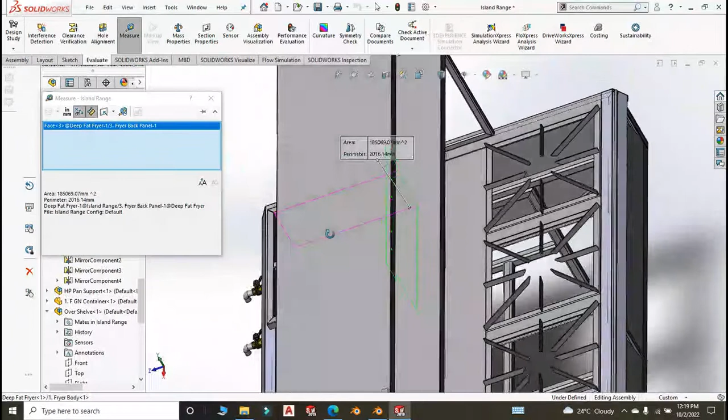So if we do 260 would be fine, by 260 by... this is 538. We do 260 by 525. That would be good.

So let us open a new file and go to part, click OK. Then as usual, most of the time we start with our top plane, start a new sketch, corner rectangle, and from the origin, make sure you give it some dimension distance there. So this we said would be 525. Remember, I'm using the metric system, and this should be 260.

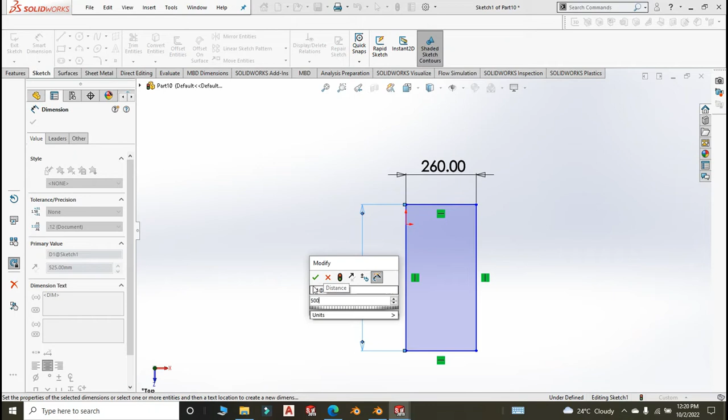The basket will be made of... actually, can we make it 260 by 500? Will the 25 make a huge difference? Yeah, let us give it 500. We are going to use a rod of diameter 3 millimeters. So here from the origin we make this 6 millimeter or something like that. Yes, that's good.

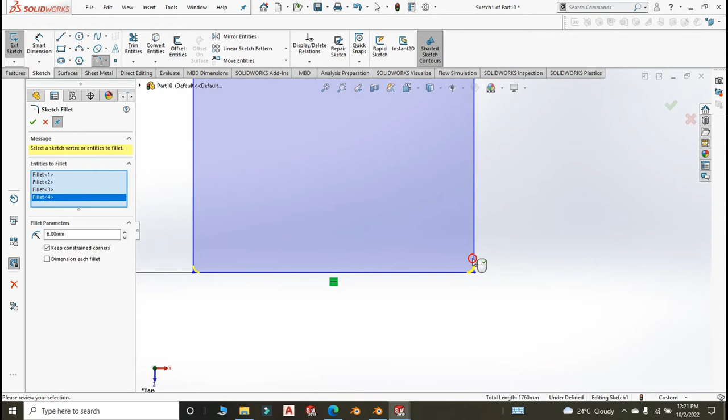Then we go to fillet, and we fillet it by 6 millimeters. We want the origin to be at that point where the fillet ends, because we intend to sweep through these. Exit the fillet and exit the sketch also.

Now if we could go to the front plane and start a new sketch, and we create that circle that we'll be using for sweeping through the first sketch, and we give this a dimension of 3 millimeters.

That part looks okay. You can assign some material to it. And this is metal. See whether we have chrome plated metal, and assign these two.

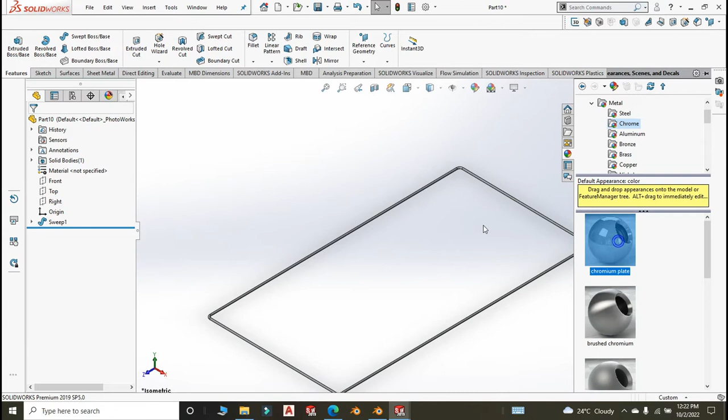We didn't choose here. Then here we double click, then go ahead and save this. I have a folder here known as fryer, then a subfolder known as basket. Call this part number 1, and we call it basket frame, or something, whatever you want.

Basket frame, save. Now before we continue, let us do this. Let me check the first sketch because I intend to move some few planes here and there. First sketch, let me try to recall the dimensions. This is 260 by 500. Actually 500 minus 6 will get what we want.

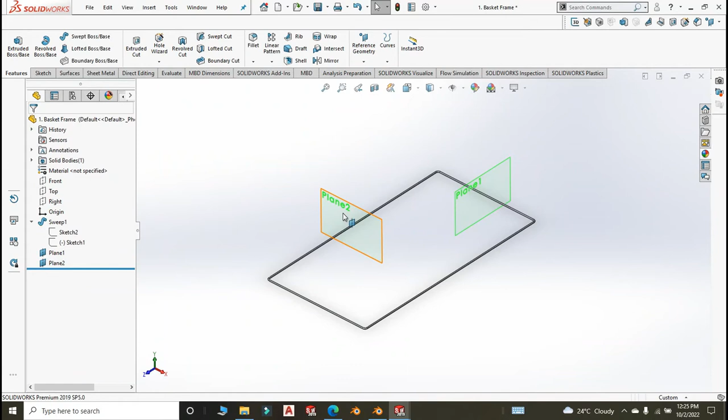Then also we go for the front plane. This front plane, we were not supposed to create a sketch there. We want to create a reference plane, and this was 500 by 2, that is 250 minus 3, 247. I'm not very sure whether it will be there, but should we need to edit it to do some adjustments, we are going to edit.

Now we create uprights. We go to file and go for new part. Okay, and we go to top plane again and start a new sketch. This time it's just a circle which we are going to extrude, and the diameter of the circle is 3 millimeters. Good. Then go to feature and extrude it, and our basket will be having a depth of around 150.

I don't know whether we should do a mid plane or... that's good, this is good.

150. That's okay. Then again we go to top plane and create a reference plane, and that should be at half of 150. Half of 150 is 75.

Now go ahead, okay, we hide this plane and we save this as part number 2, call it basket upright. You don't worry about the naming, you can name it appropriately, just come up with some words, some names.

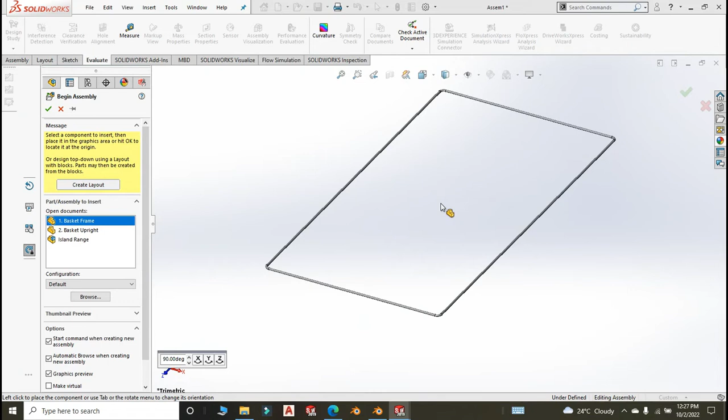Okay, we go to assembly. We want to see whether our planes are good and whether we are going to be heading somewhere. And this time around we want to import the basket frame. Let us right click and make it float first so that we may do the necessary mating.

Make it float. Then we go to mate, and we will take the front plane of the workspace, and plane number 2. That's okay.

Then we go for the top plane and the top plane of the workspace. That's okay. Then the right plane - right plane, is it right plane? Yeah, right plane - of the workspace and plane number 1, so that our base, our framework might be centered at this at the workspace.

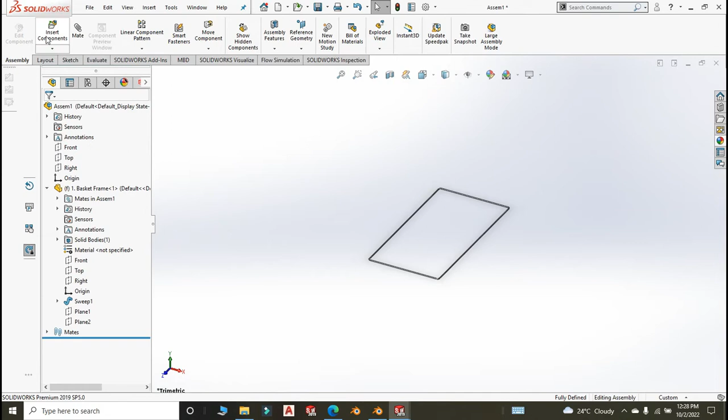Now right click it again and make it fixed. Fix it. Okay, now insert component, and our component we are inserting here is the upright. Now we can do some mating.

Go for the top plane, and the top plane of the upright. Click OK. Then go for front right plane and right plane of the framework. That's good.

I don't know where the orientation of the front plane... Yeah, I remember where the orientation is good, and this plane here. That's okay.

Now remember, this is something that you should not worry so much about when you are doing your work. We don't fabricate this - there are some guys that we contract to do fabrication. This is just for representation. You might find that it is not accurately done, but it is for representation. At the end of the day, we want our cooker to be having everything.

Now I'll go for linear component. I will choose this face as the direction. The gap between the upright members, about 3 or 6 millimeter, and we want how many of them. We will add or minus - I think it will be adding.

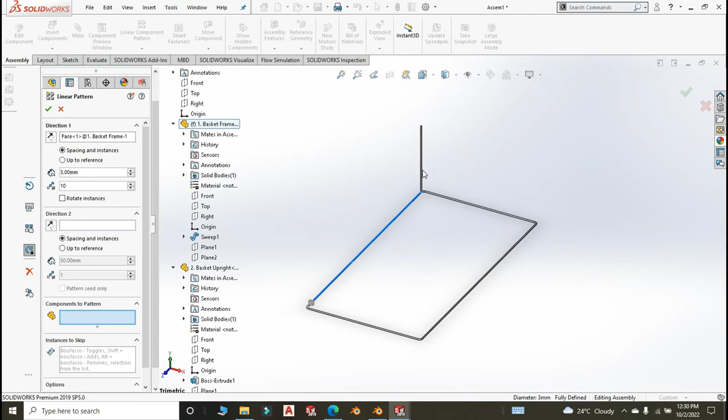From there we change direction and see how they look like. 3 millimeter is way too small. Can make this 6 millimeter. 6 millimeter still looks a little bit small. 10 is big - of course 10 is big, but we will work with 10.

Then we will increase this to around 50. See what happens. 50 is good. 50 is pretty much good.

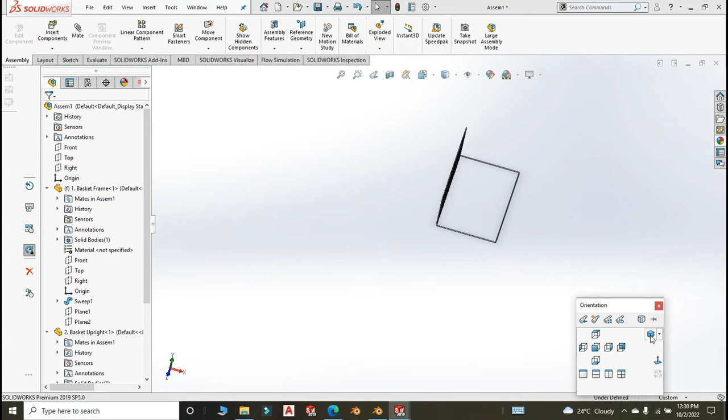Exit the linear component. Now remember the planes that I was telling you about? This plane - selecting that plane and going for mirror components will help you mirror the uprights. So you go for the linear components as the components to be mirrored. Click OK. There you have your components.

Now there is something that I didn't do - let me first save this. Save it as fryer basket. Fryer basket. That's good.

Now there is another plane - there is a plane that I created on the upright. We want to mirror... actually we shouldn't be mirroring, we should do some linear component in this direction. Change the direction, and spacing and everything is the same.

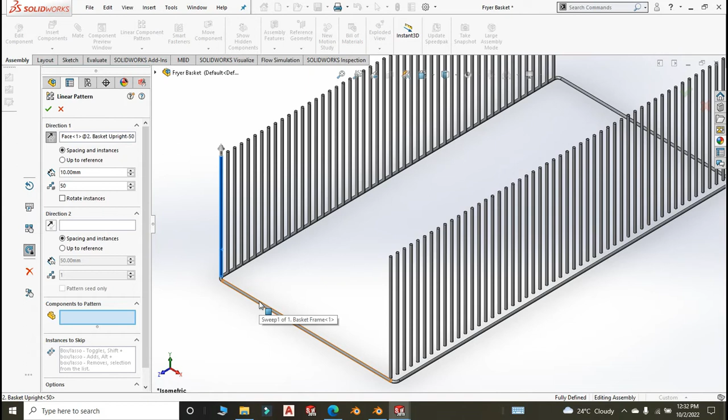Then the component to be linear is that, but 50 of them is way too much. This might be 20 or something. 20 is also a lot.

How is the last one? Should it be 19 or 18? 18, 17, 16 - that's good. Yes, our basket is really taking shape.

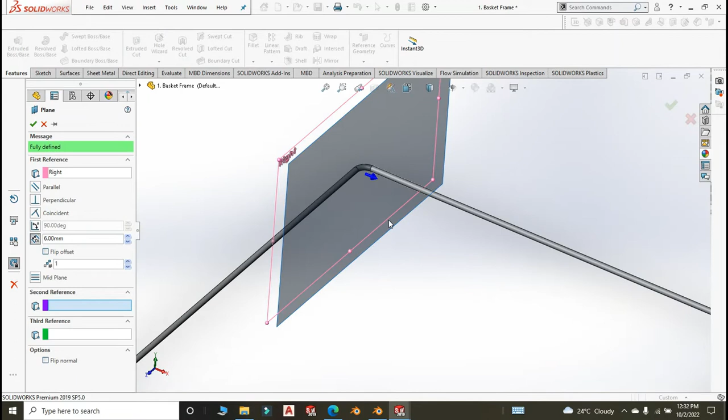Now if I could go for this, open, I need to create another reference plane, and that plane should be the right plane. I create a reference plane and offset it by 6mm. Yeah, 6mm goes right at the end of the fillet - that would be pretty much okay. That is plane number 3.

We can go ahead and hide the plane, or you can just leave it, but for the purposes of not getting confused, it is better you hide it.

Now, with that plane being there, we insert another upright member. I'm not so sure whether we have, there might be one more plane that we might be requiring, we'll see about that. So the new member we inserted, as usual, top plane and top plane of the new member are supposed to be meeting. Click OK, then we go for the right plane of the new member and the new plane that we just made as a reference, that is plane number 3. That's pretty good.

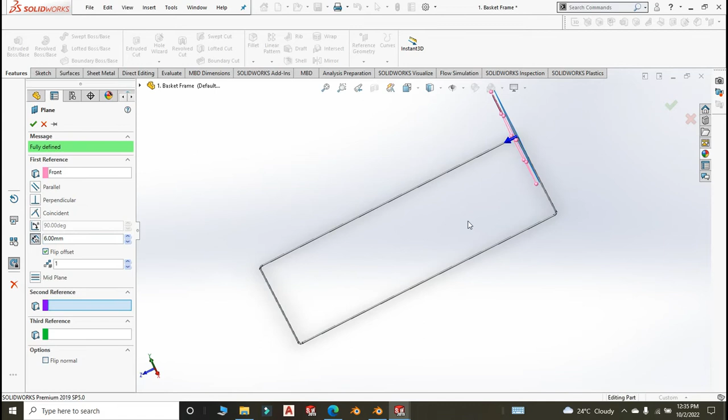Then we need another plane running up here. Let me first exit the mating, I will come and complete it. Then I open this and edit which plane do I need. This is the front plane. I create a reference plane and offset it by 6mm, but flip the offset. 6mm takes it right at the center of that member.

Hide it, go back to the assembly, and continue with my mating, and this time around I will choose that plane that I just inserted, that is plane number 4, and the right plane of the second upright member. Is it the right plane? The front plane. Yes, that's nice. Now that mate is good.

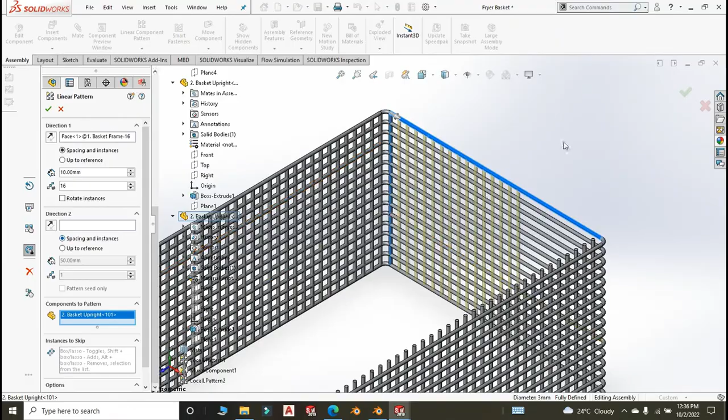Now we want to linear component. We linear that member, in that direction. The spacing is the same, but the number of components might be different. Yes, we need to add a few more. Just click on the upward arrow. Ensure that you have enough. That is enough.

Now we go to plane number 2 and mirror. Do some mirroring. We mirror that local pattern, local pattern number 3. Click OK. I hope the plane we did set it right.

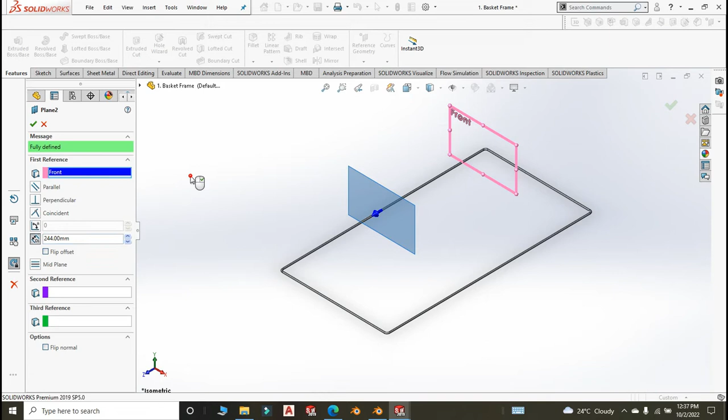No, we didn't set it right. We were supposed to edit that plane and reduce it by 3mm. Open, you can edit it from there if you want, or you can just open the drawing and subtract 3mm. I think that would be fine.

I don't know what is not happening there, there is also an issue with this. This we are supposed to add 6mm. Yes, there is an issue someplace. I don't know why that is happening. We will take a look at it.

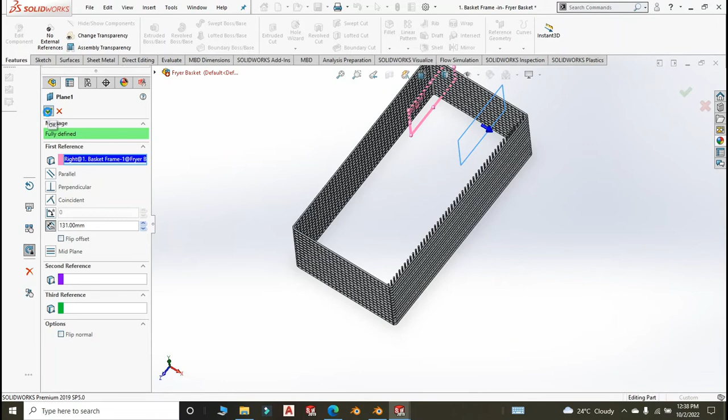Plane number 2, number 1. Plane number 1, if I was to edit it, am I supposed to add 6mm? See whether things will be working. Sometimes it might not update immediately. Plane number 2, plane 2, not plane 2 actually, but it should be plane 1. Let's see whether it will update now.

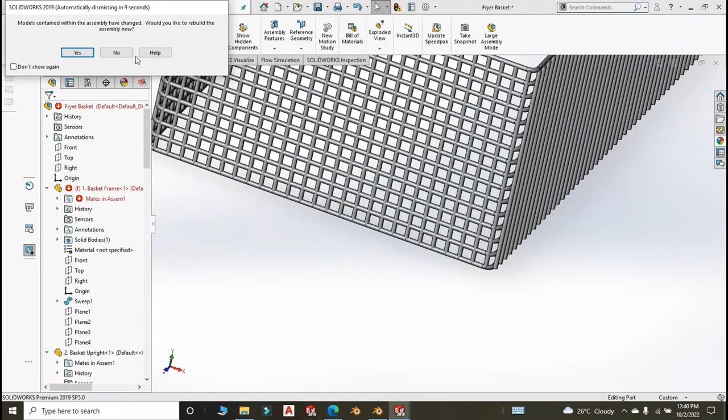We are receiving some errors. Why is it not working? Let's go back and re-edit it, then we will check where the errors are coming from with the mates. Plane number 1, edit, subtract, do 130. Why is it coming to 130? I'm not getting that. Yeah, now it seems okay, but I don't know why 130. Anyway, as long as it is good.

Why do we have issues with these mates? What kind of error is this that we are experiencing here? This coincident. Let's see whether we can fix it. That is which plane? The front plane and the plane of the workspace. Okay, I get it, because it is fixed. Can we right click this and make it float and see whether it will get updated automatically? Yes, the error is gone. Now the errors that we were receiving are gone, but now we can make it fixed again. Yeah, because we edited the planes, that is why we are getting that error.

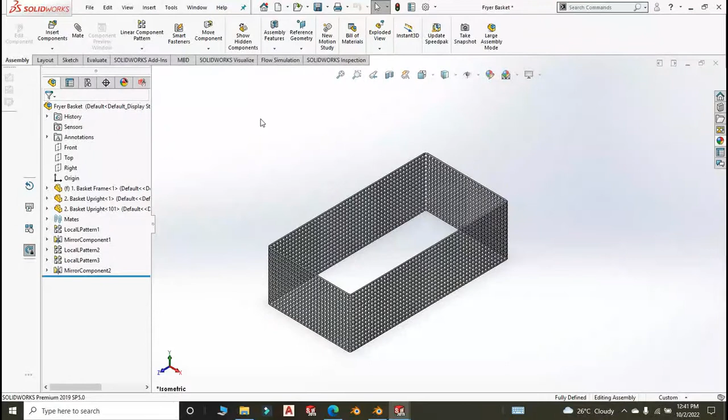Now this is 500, so we need another member there. Go to file, new, and we'll go for part. Click OK. This time around we will go for which plane? Right plane? Not really, front plane. Start a new sketch there and we do a circle, dia 3mm, and we extrude it by 500.

Is it 500 minus 12? Because we gave it a fillet of 6mm and 6mm. We will see, 500 minus 12, 500 minus 12mm. Click OK.

Save this as part number 3. Call it horizontal, or is horizontal written like that? Horizontal member 1, for the basket of course.

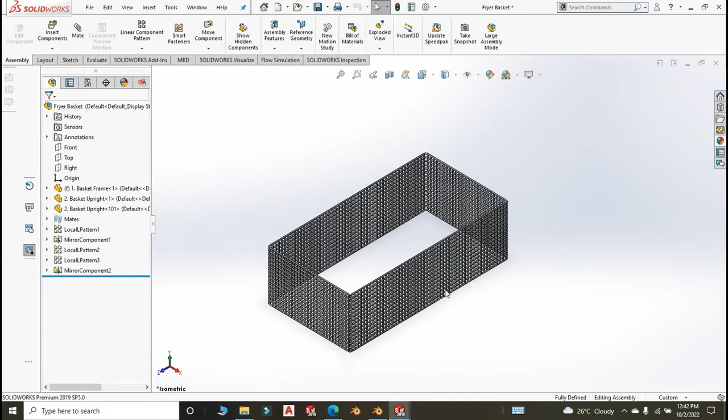Then we go back to the assembly, insert component, horizontal member 1. Now we do some mating. We go for the top plane and top plane of horizontal member 1.

Right click, then we go for the plane here, the right plane, we go for the frame, I think it's plane number 3. Then there is plane number 4, yes, plane number 4 goes with the front plane. Let's see whether that is correct. Yeah, that is pretty much correct and in its right place.

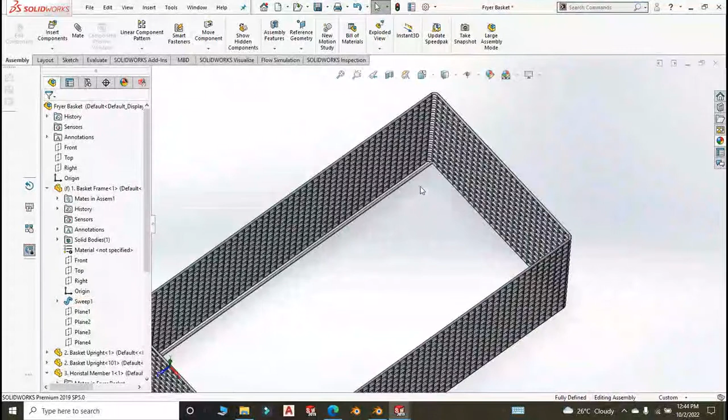Now we can still do linear component. I don't know whether if I edit this linear component, that was linear component number 3, can I edit it? Yes, and here I choose this. That's pretty good.

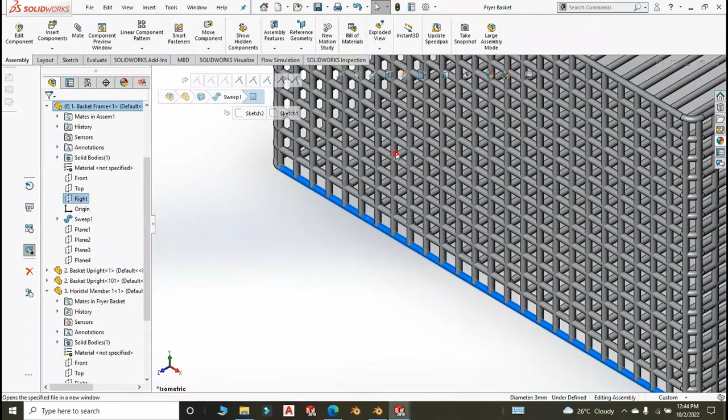Oh sure, save your work, don't lose anything. Now this was 120. It's always good to do a referencing and counter check on everything. This was 260 from end to end, so there we are subtracting nothing.

So go to file, new part, then go for the right plane, from the origin create a circle, same diameter as others, and the diameter is 3 millimeter, then extrude by 260. Click OK.

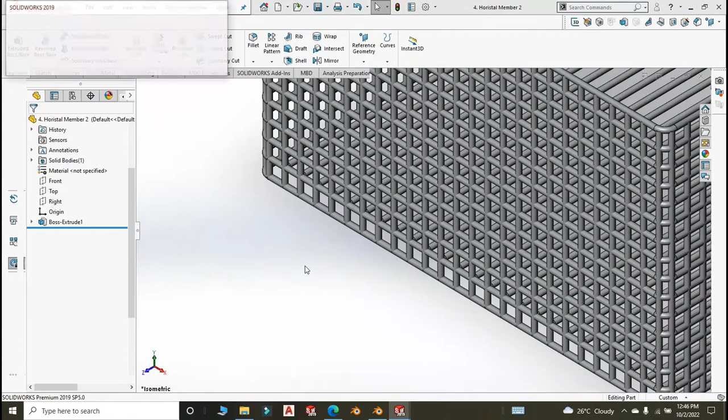Save this as horizontal member 2. Call it part number 4 if you want. Then call it horizontal member 2. Just names, kind of rename them, or give them the name that you feel is appropriate for you.

Now insert that component, not mating, but we are supposed to be inserting first before we do the mating, and we will go for horizontal member 2. As usual, the top plane and the top, all the top planes are coincident, so take top of that, then you can collapse this.

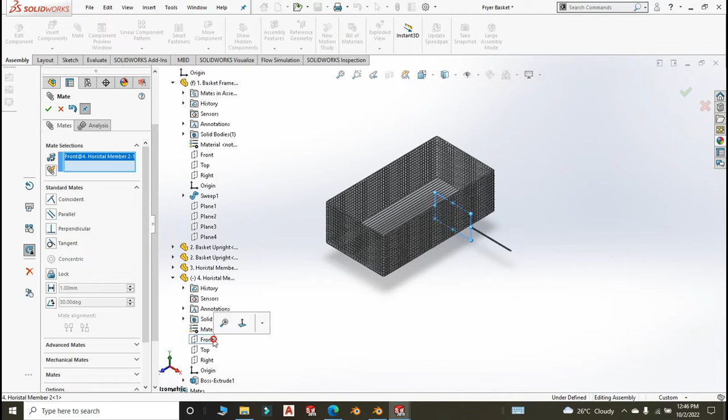Go for this, go for the top plane, click OK, then go for front plane and front plane. I think that's okay. Then go for right plane. Yeah, right plane and right plane. Click OK. Let's see whether they are good. They are perfect, they are perfect.

Now we go for linear pattern 1 and we edit it, and why is it not showing? Yeah, it is showing. And for components to be patterned, you also include this. And that basket, my friends, the body of the basket is complete.

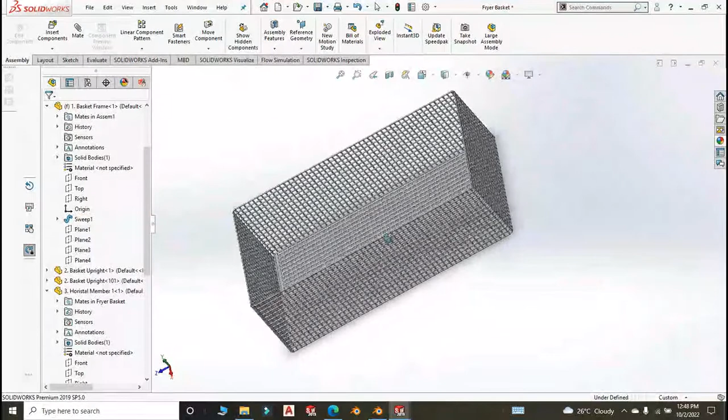While the basket looks a little bit big, but also the tanks of the fryers are big. You don't want to make a small basket, then you won't be maximizing on your fryer. So what we are going to do is to create the handle and the part that you are supposed to hook onto the fryer for the chips to drain all the oil, actually most of the oil, back to the fryer.

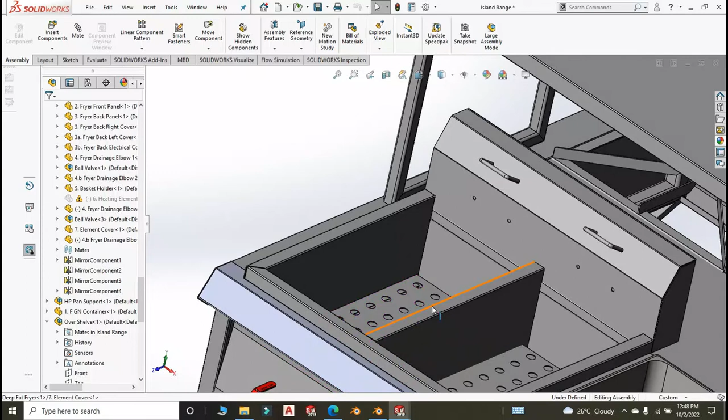That is this part here where you are going to hook. And some baskets normally have handle supports which sit on top of the fryer, so that it may not sit on the heating element, right? So that it may be suspended. You just give it some clearance from the element cover. So we will do that as we continue. So we design the fryer handle first.

Okay, I might be forced to close this. I will close this, I will close this. I think I don't need that. I will be left with this because I will need to create a reference plane here once more and go for 3D sketch.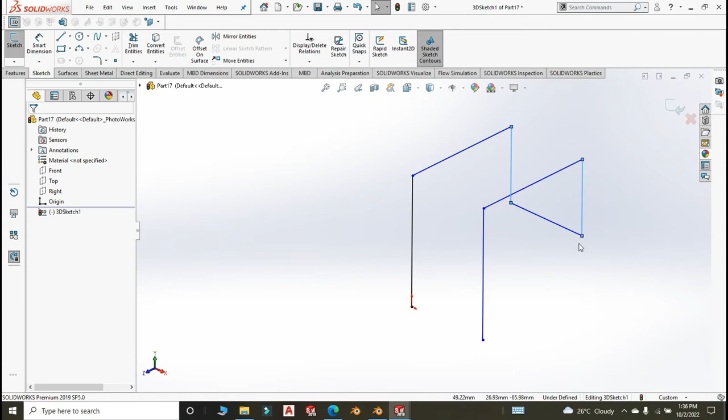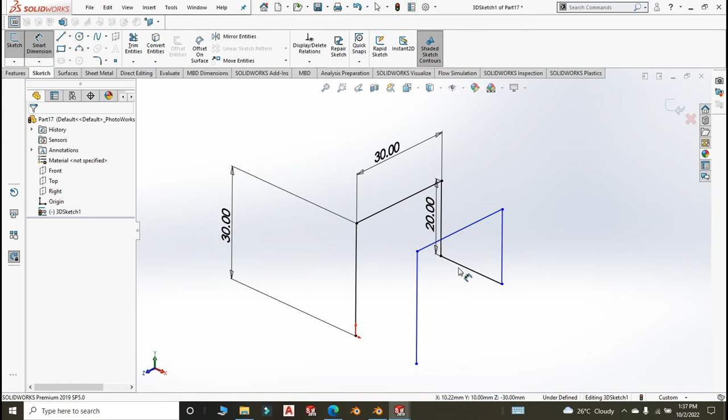Then we can give it some smart dimension here. We need just about 30 or so millimeter. I'm not 100% sure of the sizes of this thing. This we can give it 30 or so. This becomes 20. Guys, it's for representation only. And this becomes, I remember the other one we did 75. This we can make it 60.

Before we exit the sketch, let us do some fillet. We fillet this sketch by 6 millimeter again because the rod is of 3 millimeter. Fillet this, yes, this and this, yes, this and this, yes, we forgot one here, yes, this and this, yes, and finally this and this. That should do. Now exit the sketch.

Exit the fillet and the sketch. We will confirm this dimension, whether it should be 60 or what. Now go to the top plane and start.

Draw a circle from the origin. The diameter of the circle is 3 millimeter. That's good. Exit the sketch so that you may execute the sweep.

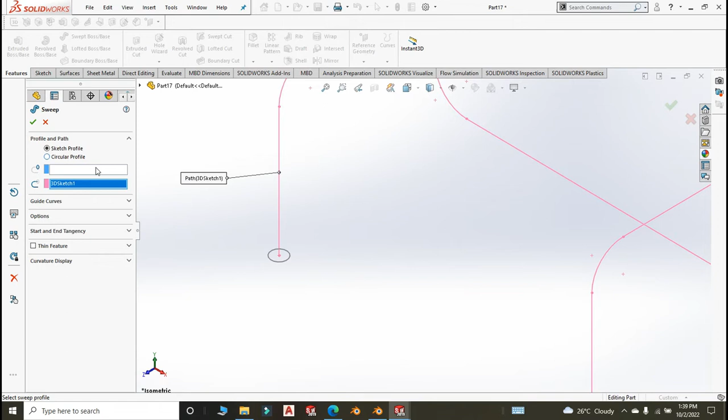Now go to feature and choose sweep. This is our first sketch that we are going to choose. I think it jumped, this one here.

And you have your nice bracket for that matter, but the dimensions don't look so pretty good. I might need to confirm that once we do the assembly, we shall see. But remember guys, this is for representation. It's not those dimensions, don't follow them when you are fabricating. Should you choose to fabricate it, just grab the method, forget about the dimensions, get your right dimensions and use them. Hooking bracket or hooking rod bracket.

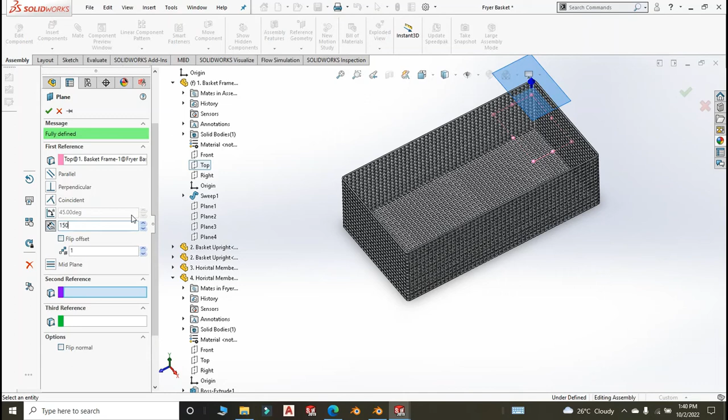Now I will need to do a few things here. If I choose this right top plane, can I do some reference plane with it? Reference plane, and I take it up by 150 so that it may go to the top of the basket. Yes, that's good.

Where did it go? Plane number 1, it is going to plane number 1. Yeah, let us not hide it. Then it's going to plane number 1. Yeah.

I will need to do this. I choose this, open. There was a plane that we did take it to the center, plane number 1 again. I will do a reference plane, and that plane I will give it 30 millimeter. That's good.

Yes, now I think I have enough planes to do assembly of the hooking basket, of the hooking bracket, sorry. So if I may insert component, and the component is that hooking bracket there.

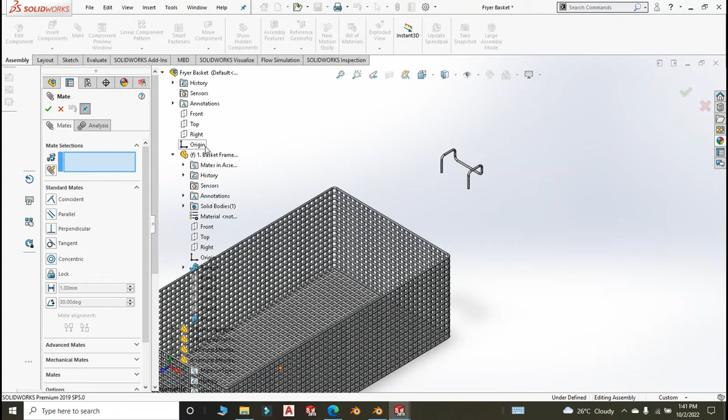Then I go for mate, and mate I will choose plane number 1, which is that top plane. I was asking you, where did that plane go? This plane here. Then I mate it with this new component that we just inserted, the top plane of that.

That would be good. Then I will be required to go for plane number 5. I think that plane is not right. I would change that, there is something that needs to be changed there. Let me see, plane number 4. No, we clear this. Plane number 4. Yes, number 4 is good. Number 4 with that plane there.

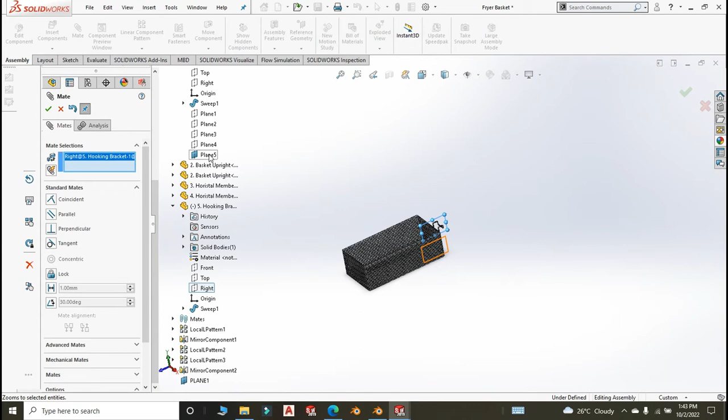Then I can still go ahead and mate this right plane with plane number 5. Then I will change it, I will flip the side, because when you take a look at our hook, it is offset more to one side.

So I go to plane 1 and edit that plane. All I need to do is flip. Why is plane 1 at 150? It's not plane 1, I think it is which plane? Let me see, plane number 5, I think.

Plane number 5, yes. I edit this and flip the side, yes, so that it may coincide with the other plane, and that basket hook will be centered at the middle of the basket.

Update the changes. Yes, now you can see the basket, the hook is at the center of the basket, right? Now let me create

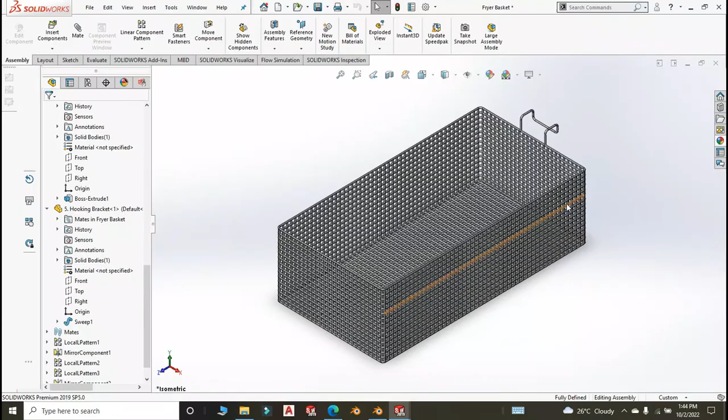the handle. Let us go for the handle first. We save this and we go. Let us do the handle. We go for file, new part, okay. Then we go for the right plane, start a new sketch.

We do a construction line here like that. Then we do another line like that. Then we smart dimension. The angle between this and this should be 30 degrees, sorry, and between this and this we just need a very small gradient there, which is 5 degree. I'm used to doing it in millimeters.

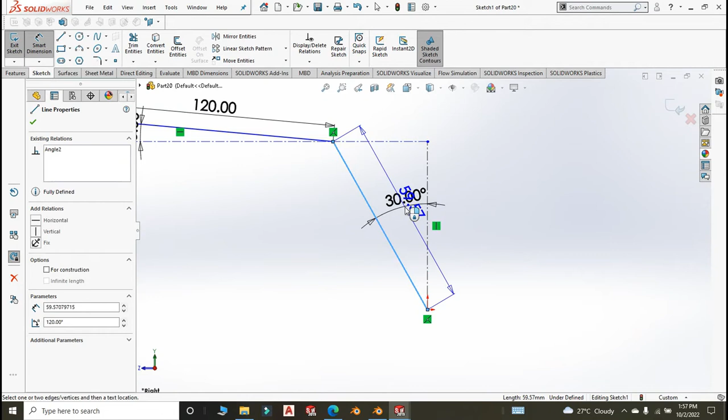Then we smart dimension, this we give it, yes, we make this 120, and this we make it 50. Yeah, that's good, looks fine.

Then we fillet and give it a fillet of 30 millimeter fillet from here between those lines. Click OK, exit the fillet, exit the sketch. Go for the top plane, start a new sketch.

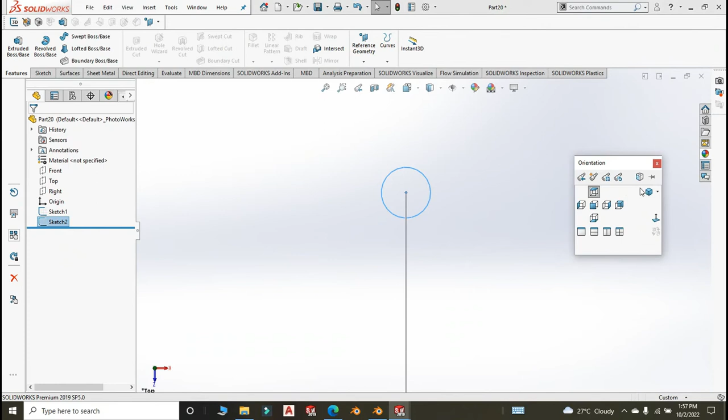That is the profile that we'll be using to sweep, which is 3 millimeter rod. 3 millimeter, exit the sketch, then go to feature and choose sweep.

Choose sketch 2. It was already chosen, I don't know why, I did whatever I did. Sketch 2, then the other one is sketch number 1.

That looks good, looks good. We might need to edit if need be, but it looks good. Now I will save this as part number 6, handle rod.

Yes, because there is the handle plastic part of it. Now I will need to go back here and create a plane running around here. So I will take plane number 4 and create a reference plane, and that should go all the way 500, because that is the size of that basket, and I will be good with that.

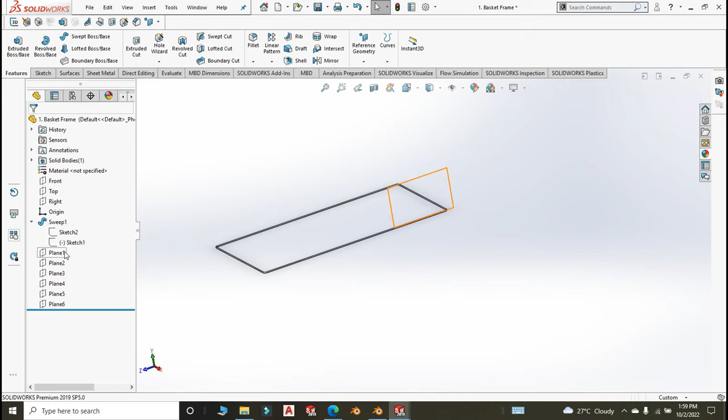Now I hide this plane. That handle should be of about, is it 60 millimeter? Should we do 60? We shall see, 60 looks big, 50. So I will take the sketch at the middle, that plane, and a reference plane number 7, and I need to offset this by 30. I think we have that by 25, and it being by 25, yes, just leave it at that.

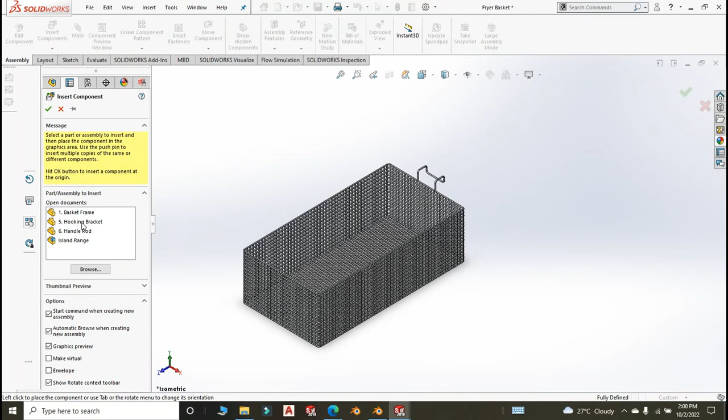Let us continue with our assembly and see whether we are on the right direction. Okay, yes, so I will insert that hook handle rod, then do my mating. I will go for the top plane, not that one. There is plane number one, plane number one was the top plane. Yes, that top plane and the top plane of this hook, not hook, handle. That's good. There is a plane that I didn't incorporate in my design, then plane number 7 with the right plane. Let me exit this.

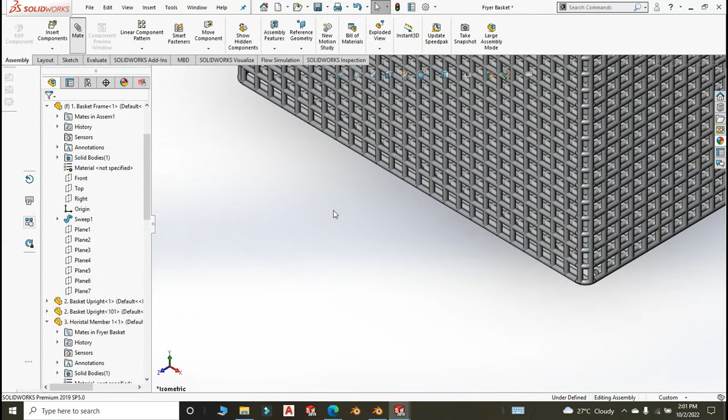Then I will still go for this and create another reference plane. This time around is the right plane, the front plane, not front plane, let us take this plane here. Did we create this plane? I think we did. Let us mate and see. I think we created that plane. Plane 7, plane 6, plane 6. Yes, that plane 6, we mated it with that front plane. Yes, that is pretty good.

Now allow me to do one trial and error thing. If I go for front plane 1 and mirror components, I don't know whether it will flip. That is the component that I want to do. It has not flipped, that is pretty good.

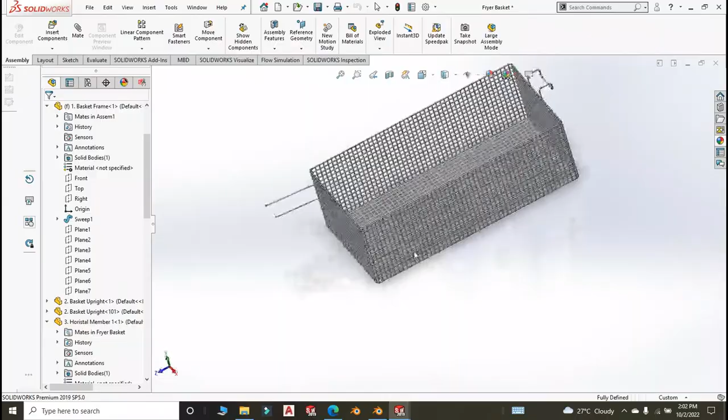The handle looks abnormal, it is very big, so we will edit plane number 7. Let us edit it from the part so that it may update immediately. This plane here, and we will do 10 millimeter, 10, so that it may be 20. The center to center of those handles be 20 millimeter. We can do a handle of 30 mil. Yeah, this looks a bit realistic now, looks realistic.

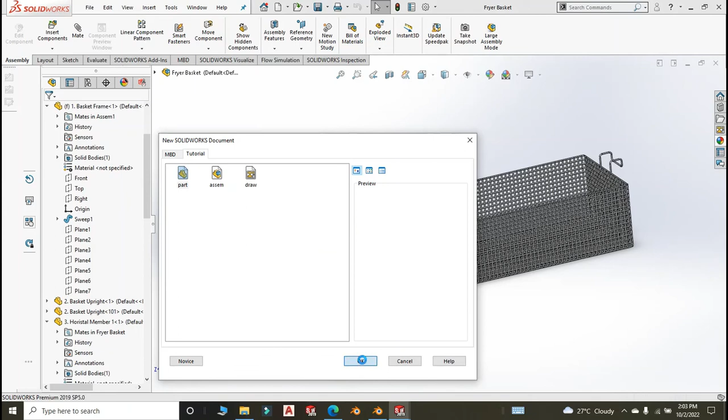Now let us go and save this, save everything, then go for file, new, but we need to do the plastic. This plastic will go for top plane, should we go for top plane? No, I don't think it should be top plane. Yeah, we can do top plane, and we go for center rectangle like this. This we make it a 30, and this we make it, the other one was 120, this we can make 100.

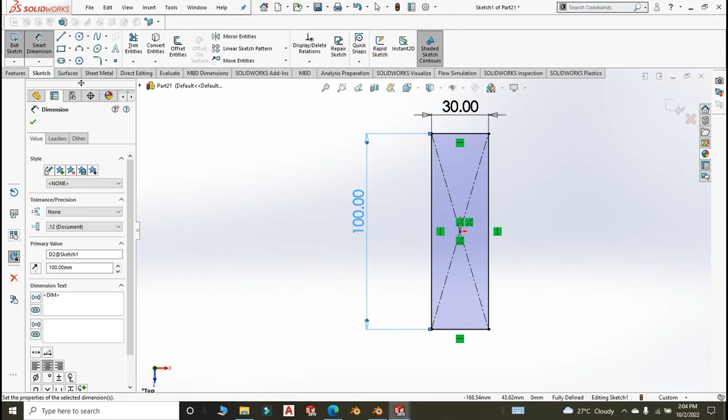Then we extrude, go to feature and extrude mid plane. The plane doesn't matter, this we do 30. 30 looks terrible, man. 10, even 10 is, yeah, 10 is good. Sure. No, we are not going to do shelling, we will do fillet, we'll go for fillet. We can fillet it by 2 millimeter or 1 millimeter.

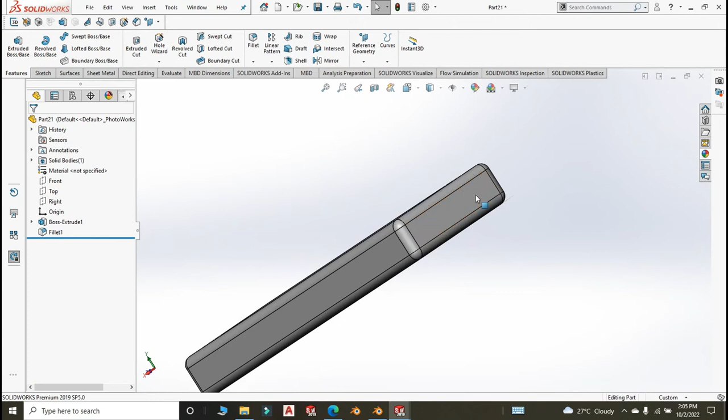Can we fillet that face, this face, the faces, this face, and see what happens. Yeah, it looks somewhat good. Then we select this face, start a new sketch, we create a center line here, which should be vertical. This line here we don't need. Then we need another center line, which is not very necessary because you can just align your circles. And here we want a circle

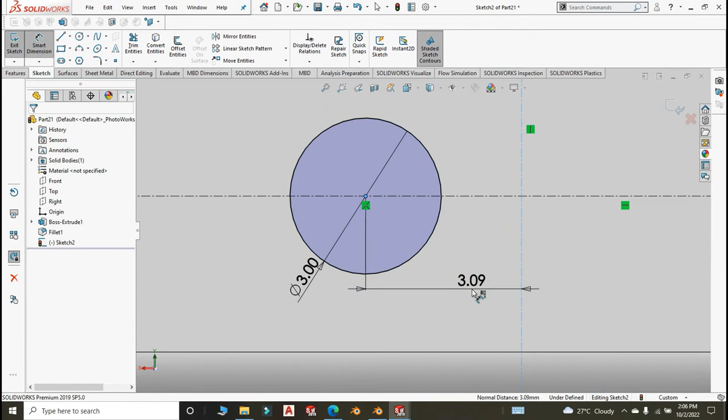like that. Our rod is 3mm, you want a very tight fit, so keep it 3mm. 3mm should be the diameter, and from these centers make it 10. Remember, we have mirrored that item from the other one by 10mm. Then you can choose to mirror the circle and mirror about the center line. That's good, now go for extrude and cut. Extruded cut. Make this 80, the depth be 80. For representation purposes, I think that will be good.

If you want, you can assign this material and give it a rubber material. Is it rubber or plastic? Plastic, I think. Plastic. Then we go for which one? We need a colored plastic.

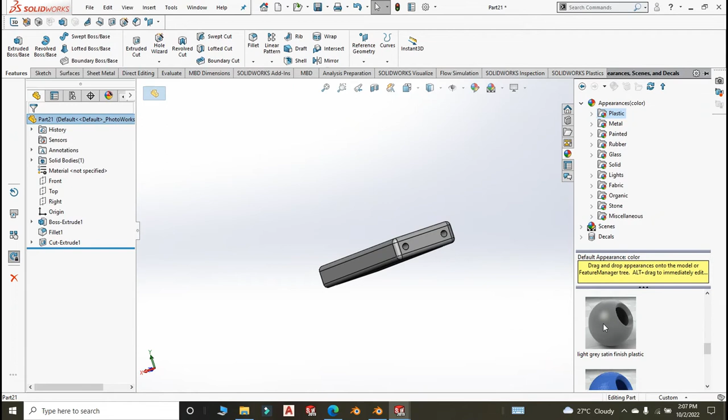Satin finish. Add it to the part. Can we give it a color, blue? Or black if you want. That will be good. Save it as part number 7 and call it plastic handle. Yeah, that is good.

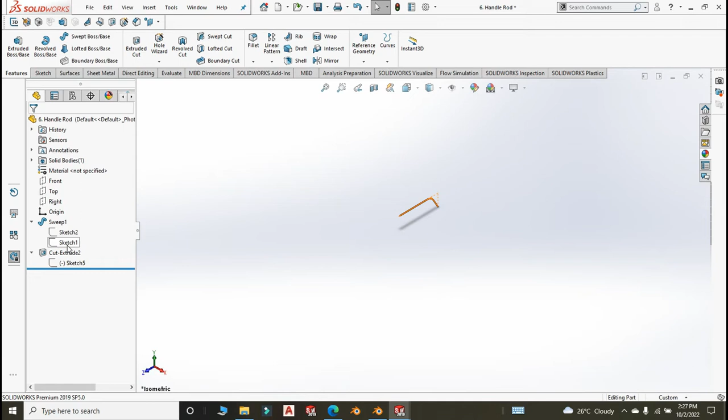Now that the handle is ready, we need to do the assembly. But before that, let us go to the handle rod and create some reference planes which will assist us in mating. We have sketch number 1. We want to create a top plane. Let's do some dimensioning. We see how much between there and this is 43.3. The other one will do something like 100. So we go for the top plane, do reference geometry, which is a plane, and set it at 43.3. That's good. Then we go for the front plane, create also a reference plane, and give it 100mm. That's good.

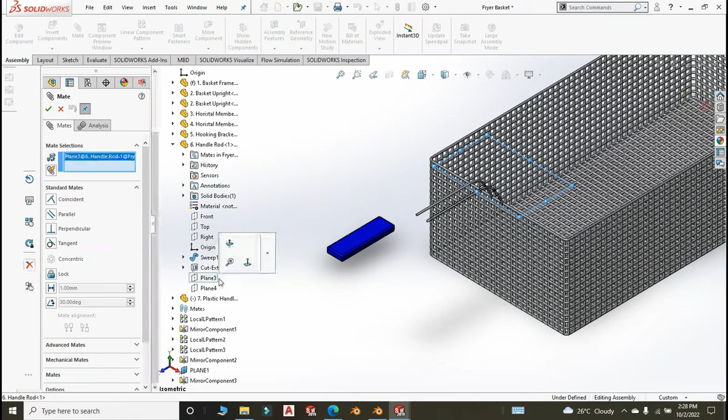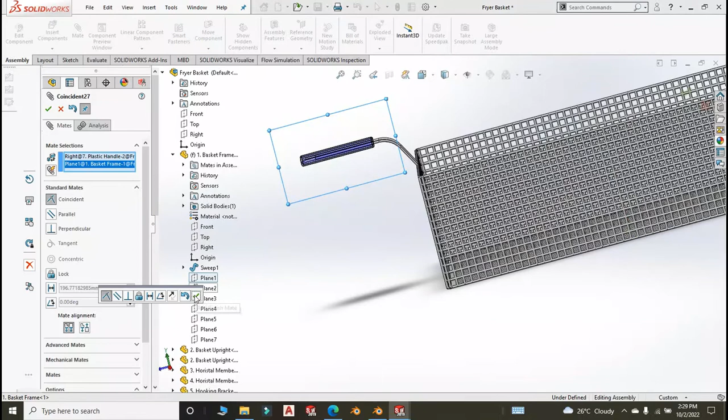So there we go, we hide this plane and we hide this plane. Now we go to the assembly of the basket, update it, then insert component, which is plastic handle. Then we do mating. Our first mate, we will go for plane number 1 on the handle rod, we can go for the top plane. That is plane number 3, and on the plastic we go for top plane. Yes, that's good. Then this front plane here, we mate it with plane number 4. That's good. Then we go for the right plane of the plastic handle, and we go for the very first plane that is running in the middle, that plane there. And I think our handle is in its place and properly constrained. Yes, the basket is good, the handle is good.

Let us insert it on the main assembly of the cooking island, and there we might be facing some challenges here and there. We will handle them accordingly.

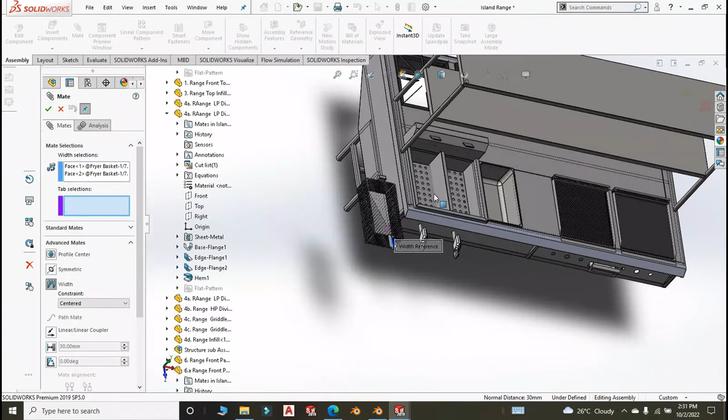What we want to do is bring the basket, the fryer basket. There is our fryer basket. We mate. Shall we try width mate, advanced mate, and we go for width. Since the handle is at the center of the basket, we can choose this face and this face, between this face and this face here. Yes. Then I don't know whether still we can do width between this. No, this one won't give us a width.

We can go for standard mate and give it a distance of, let's say, 10 millimeter, between this and this. Yes, we still have room there. Then we still can do a distance of, say, 2 millimeter. Remember, this is something that is removable, between this and this. Yes.

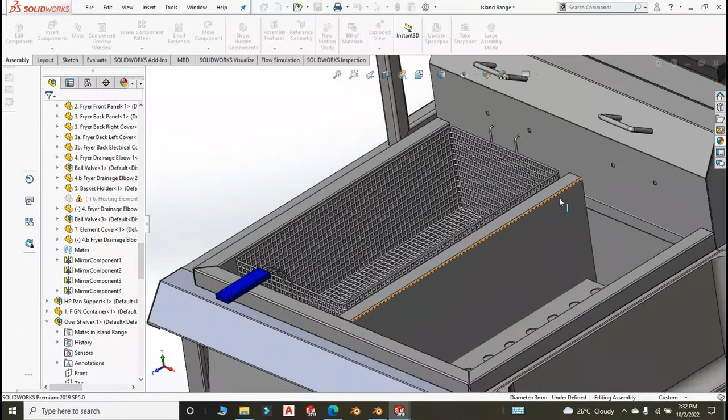Yeah, but now we have a very small issue here which will need to be addressed, and we will need to do a lot of adjustment. You see the 500, so that we may accommodate this, the 500 is big, we need to do something like 450. I saw it coming. Let me just change everything and we will be good. No, that will require us to do a lot of changes, because you will be required to change this to 450, then change these members to 450, and also the planes there. You will do a lot of changes, and there will be so many mates that will be disturbed.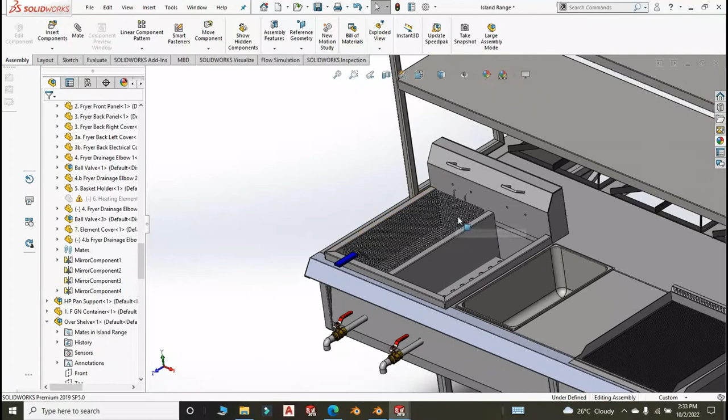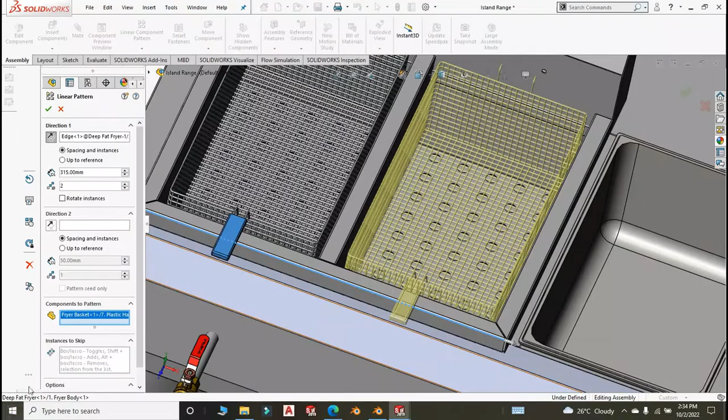Now, I was saying you need to put stoppers so that the basket doesn't sit on that, but still, because the element is covered by that perforated plate there, it can still sit on top of that plate. It won't be sitting on the elements. I don't find those brackets that are placed on the sides attractive. I almost hate them.

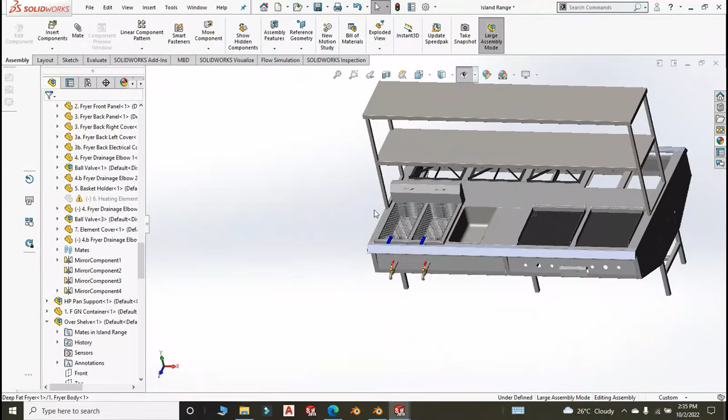We will correct this, go ahead. Make this 450 - the initial sketch of the frame, make it 450. Then change everything accordingly, right? You will need to change the planes, and also the length of this to 450. Some planes there will change, especially the one at the middle and the other one we made 500.

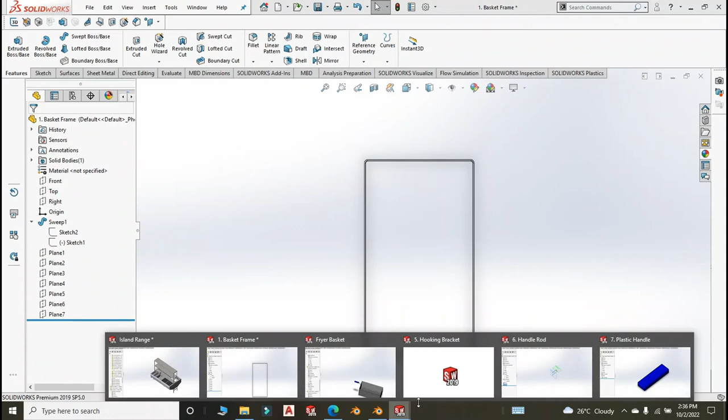Or should I just go ahead and do that? Okay, let me make some changes here. This first sketch, we are saying make it 450 - we reduced it by 50 millimeter. Then go ahead - that plane is good. This plane here, edit it and reduce it by 50, subtract 50 millimeter. That's good.

Actually, there is no other plane that you need to change. Okay, then go for open - not new, but open one of the components, the horizontal member one. Yes, this one, and change the extruded boss to 50. Subtract here 50 millimeter, because that is what we have changed, and save.

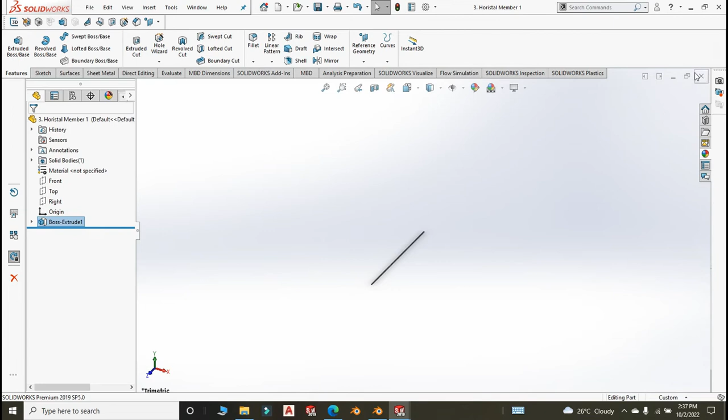You save everything. Can we close it? Can we also close this and save changes? Yes. I told you there will be some errors here and there. Here we are - no errors. Yes, there will be so many errors.

Let me open the basket itself so we may see where we are having issues. Fryer basket. 450 - we should have subtracted what, 25? I don't know. Now linear pattern 1, we will change that. Linear pattern number 1, we edit and reduce this by the number of items here.

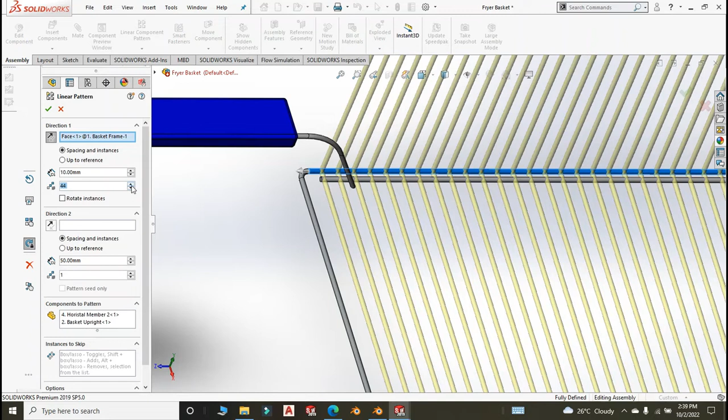No. Yes. I don't know about that. Okay, no problem with that. Did it change after 450?

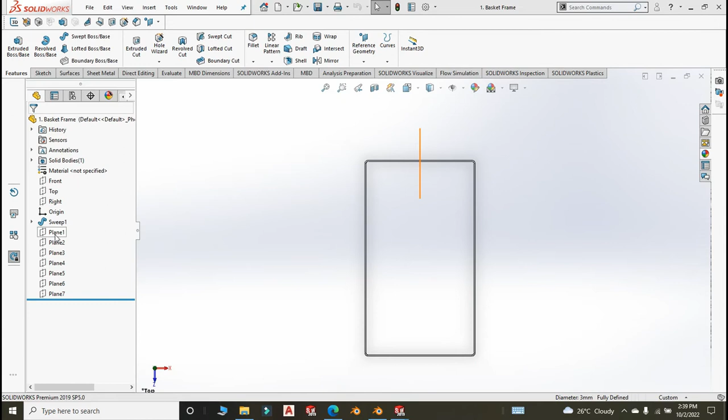Let us open this part here and see what's not happening. Sketch number 1. Edit - yeah, we changed it to 450. We need, let me see, let me do a center line here. Then I get the dimension from the origin to the center. That is 219, okay, 219.

Yeah, there is also some plane there that we need to edit, 219 - this is 219. I believe now that plane is in its place. We have plane number 6. Number 6, we edit it to 450. Is there any other plane that needs to be changed? I don't think so.

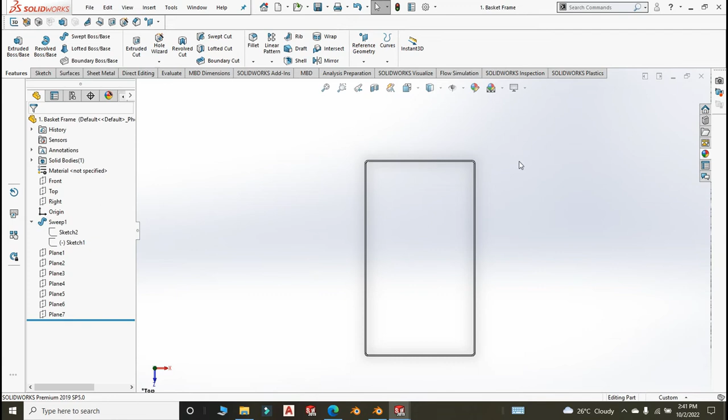Let's see how the basket behaves. Yes, we also are experiencing some errors here and there. Where is that error? What mate is that which has some error? This coincident - ah yes, this coincident. Now all you need to do is right click it and make it float so the changes might be effected, just like that. Then fix it again. Fix it.

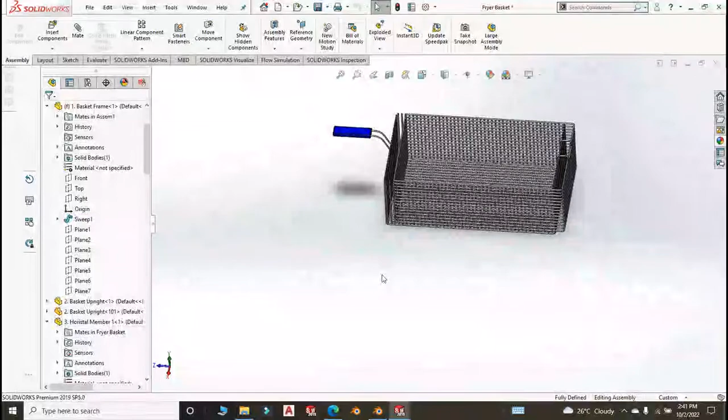Now after having done that, 450 - why are these others not changing? And we changed this to 450. Does that mean we need to change all the linear pattern, or we just delete that linear pattern?

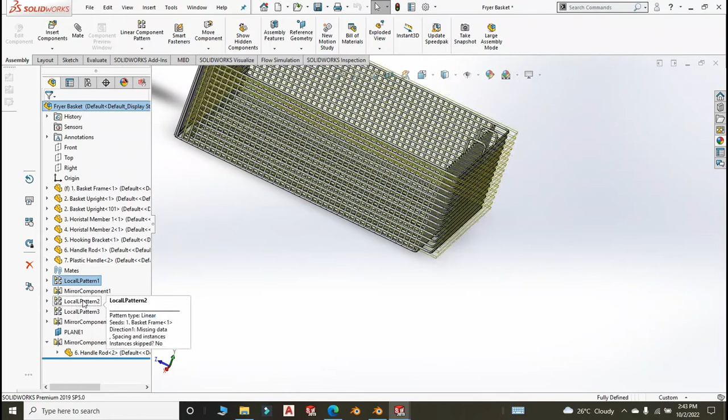Linear pattern number 1. Linear pattern 1 - not 1 but 2. There is a pattern here which doesn't look pleasing to the eye. We collapse this and this and this. Just a small thing that needs to be changed, then we will be good. Local pattern 2, local pattern 2 here. This one.

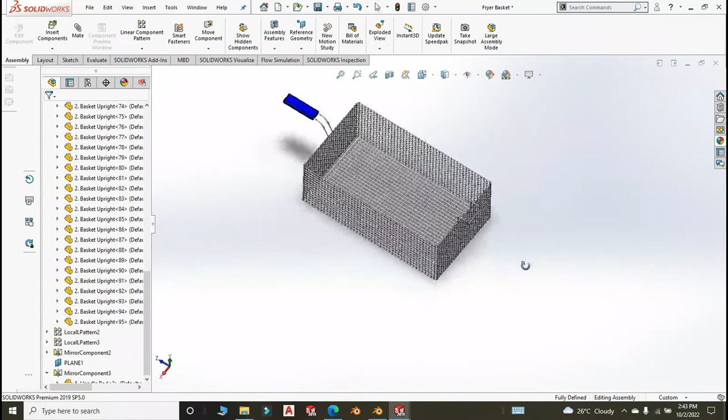Basket frame, clear selection, then we select this again. Okay, I got you. We didn't select the path - that's the path. Yeah, now it looks good. I'm wondering why we were having the overlay of the other one. Yes, that basket looks nice.

Now if we go to the range, then we go for mates - so many things here. We collapse that, we may go for not over shelf, but this basket here, or no, we go for the mates, and we need this distance here. Is it? Yes, this distance here, we edit it and make it something like not 10 but - let me see if I make it 65, what will happen? 65, we still don't have - we have clearance. Actually we can maintain the 65, we have enough clearance for the hook. And is it touching the... no, we have clearance here and we have clearance there.

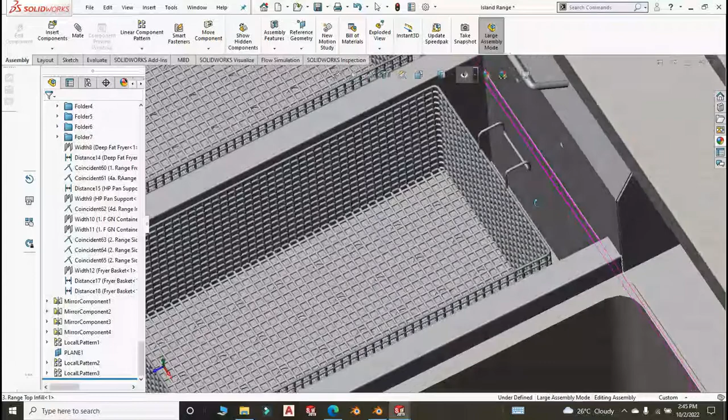Okay, and again this is something that you place by your own judgment, you just insert it there, do some shaking here and there. The idea is to have enough room for both this handle and for the back part of the basket. But I feel like this is good now.